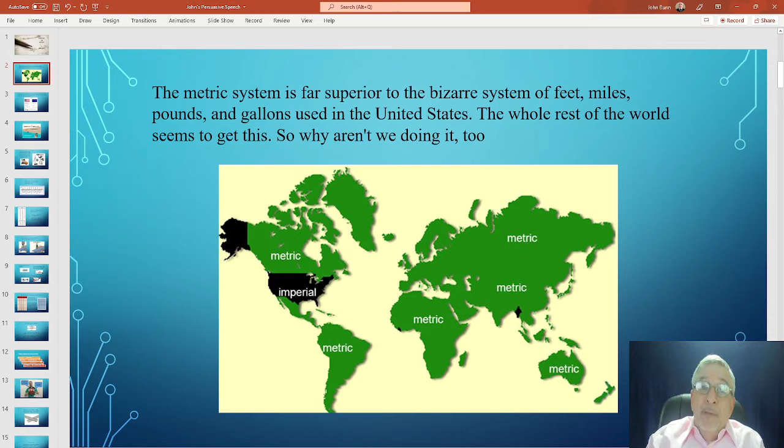Good afternoon. I'm John Bunn, and I'm speaking to you today to convince you why the United States should adopt the metric system. The metric system is far superior to the bizarre system of feet, miles, pounds, and gallons used in the United States. The whole rest of the world seems to get this, so why aren't we doing it too? There are many reasons why I feel we should change to the metric system, but for my speech, I'm just going to discuss the technical side of linear measurements and weights.

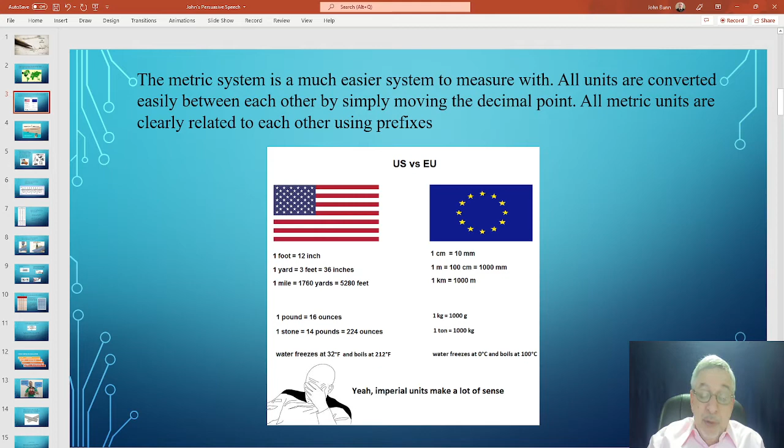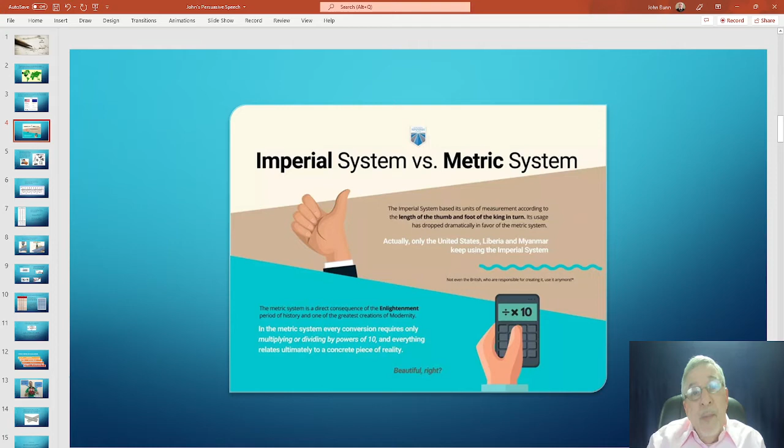The metric system is a much easier system to measure with. All units are converted easily between each other by simply moving the decimal point. All metric units are related to each other using prefixes. Kilo means 1,000, so we instantly know that 1 km means 1,000 meters. I was a machinist for nearly 20 years. Everything had to be made to precise measurements. I've been doing construction work for over 10 years. Everything must be cut to a precise size.

I think it was best summed up on the website acreofpints.com, the pros and cons of the metric system, when it says the metric system is simply based on 10. Metric units can be as precise as you need them simply by moving down to the next prefix unit. If 1 gram is not precise enough, you can use milligrams.

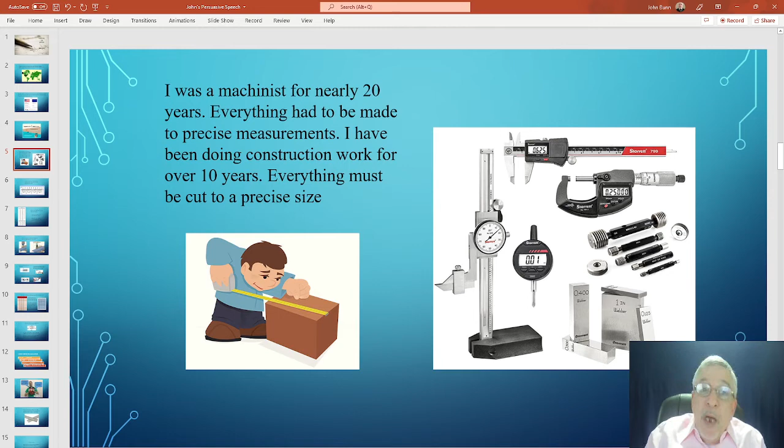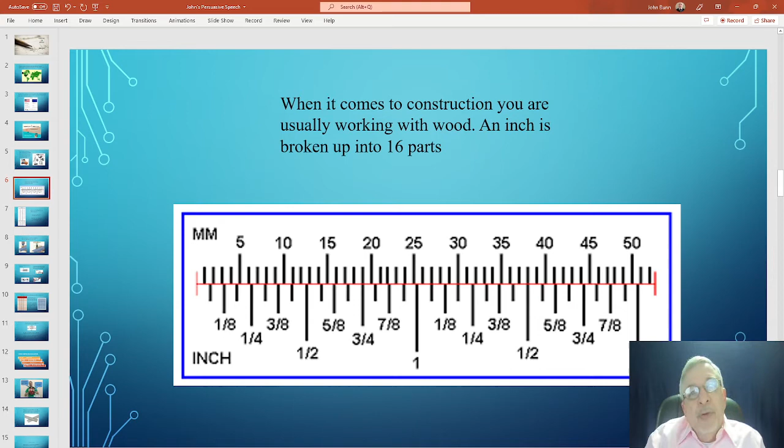When it comes to construction, you are usually working with wood. An inch is broken up into 16 parts, 32 parts if you need to be more precise. A 3/4 inch sheet of plywood is listed as 23/32 thick. Wouldn't it be easier to just ask for an 18 millimeter sheet of plywood?

Now, let us look at working with metal. Suppose you need to drill a hole at a very close tolerance. There are 115 different drill sizes under a ½ inch. Metric drills run in tenths, 5.1 millimeters, 5.2 millimeters, or even hundredths if you need to be very precise, like 5.25 millimeters.

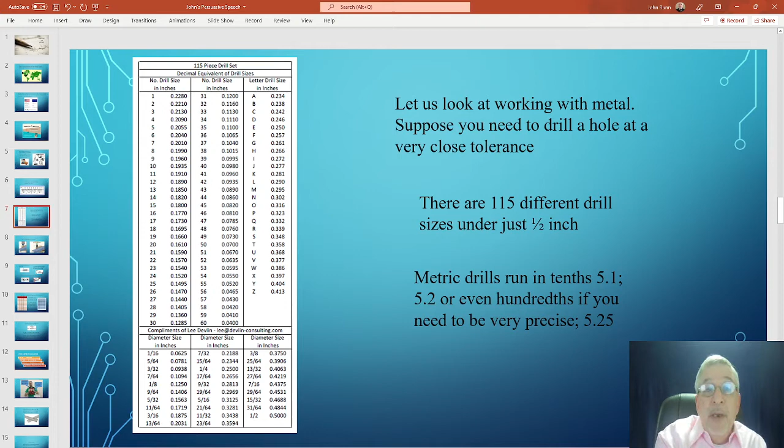Now, the standard drills come in 3 different classifications. Fractions are measured in 64ths. There are 64 sizes in an inch. Then there's the wire sizes. There's 80 different wire sizes. And then you have the letter sizes running A to Z. There's 26 different sizes of them.

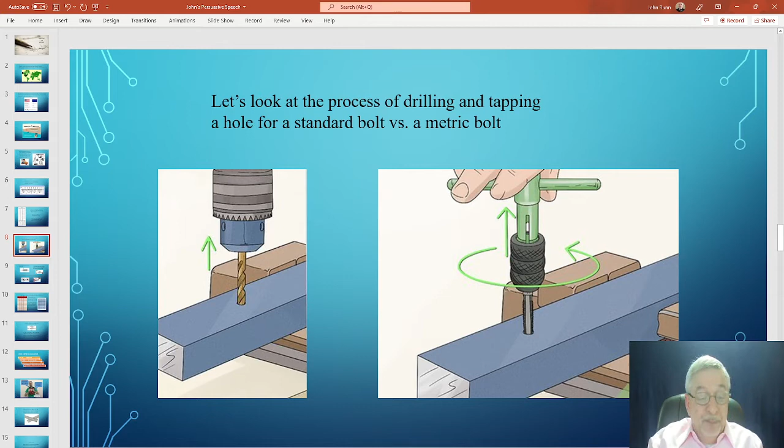In conclusion, I will explain the process of drilling and tapping a hole for a standard bolt versus a metric bolt. First, a bolt is sized by its diameter and thread pitch. For a standard bolt, the threads, called the pitch, are measured by how many threads are in an inch. Let's take a common 1/4-20 bolt. That means it's a 1/4 inch diameter, 20 threads per inch.

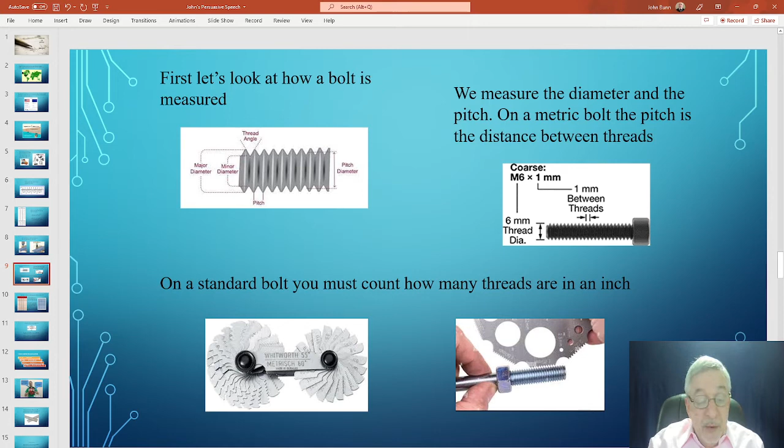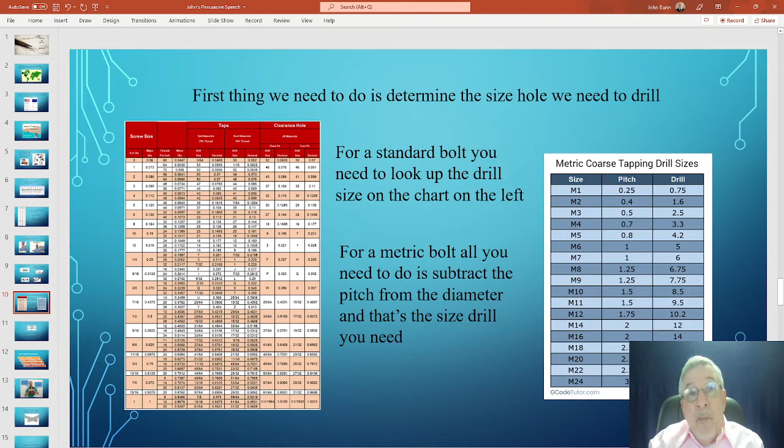To drill a hole before I tap it, I have to look it up on the chart to find out what size drill bit I need. In this case, it would be an F drill, 0.201 inches. Now, I realize you can't read the chart on the left. I just wanted to give you an idea of what the chart looks like, and that's only up to 1 inch. Now, for the metric bolts, it's very simple.

I will use a common 6x1 metric bolt. It is measured the same way with one exception. The threads are measured by how far apart they are. The 6x1 metric bolt is 6 millimeters in diameter, and the threads are 1 millimeter apart. For the 6x1 millimeter bolt, I just need to subtract the pitch from the diameter, and I know what size drill to use. 6 minus 1 equals 5. I need a 5 millimeter drill.

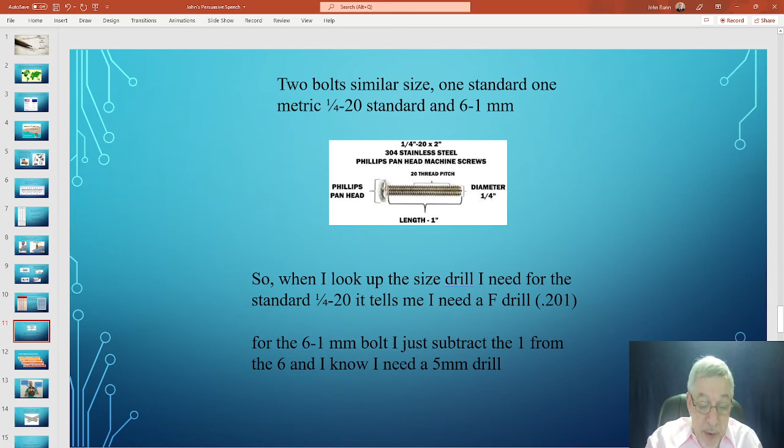Now let's play around with just some simple calculations. Say I want to convert 2.5 kilometers to meters versus 2.5 miles to yards. Okay, 2.5 kilometers is 2,500 meters. To go miles to yards, I go 2.5 miles times 1760 yards per mile equals 4,400 yards.

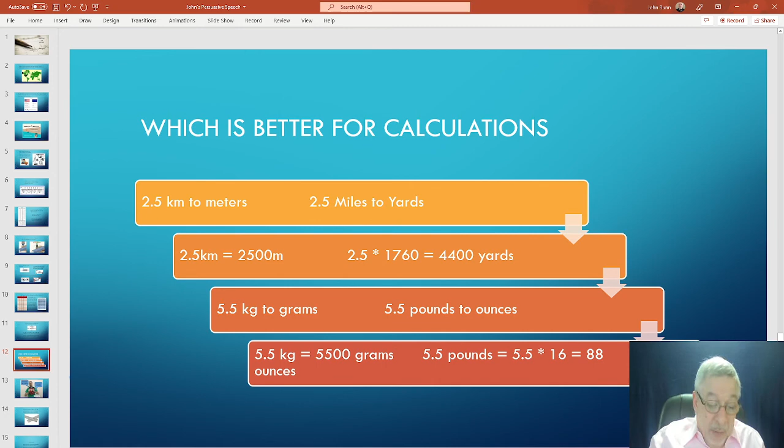Now, if I want to convert 5.5 kilograms to grams, 5.5 kilograms equals 5,500 grams. If I want to convert 5.5 pounds to ounces, I've got to go 5.5 pounds times 16 ounces per pound equals 88 ounces.

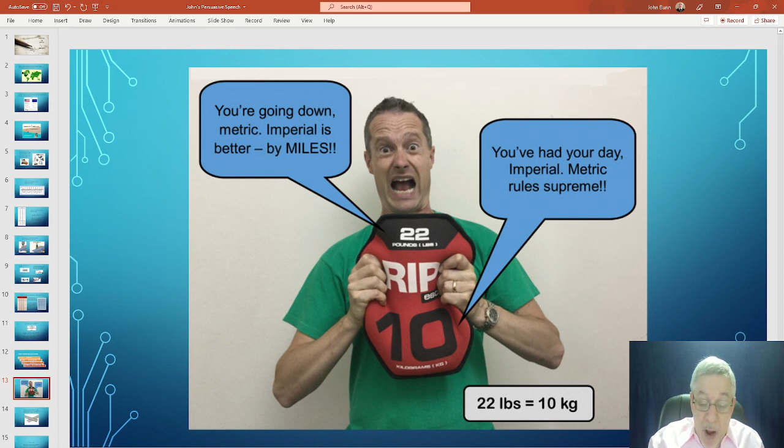If after this you still prefer the imperial system, it may be because it's what you were brought up with and it's what you're used to. But the average Frenchman or Chinese woman wouldn't understand what a mile, a gallon, or a foot is. The huge advantage to the metric system is that it's standardized. It's the same all over the world. Having spent most of my life using both systems of measurement, I can honestly say that the metric system is far superior in every way.

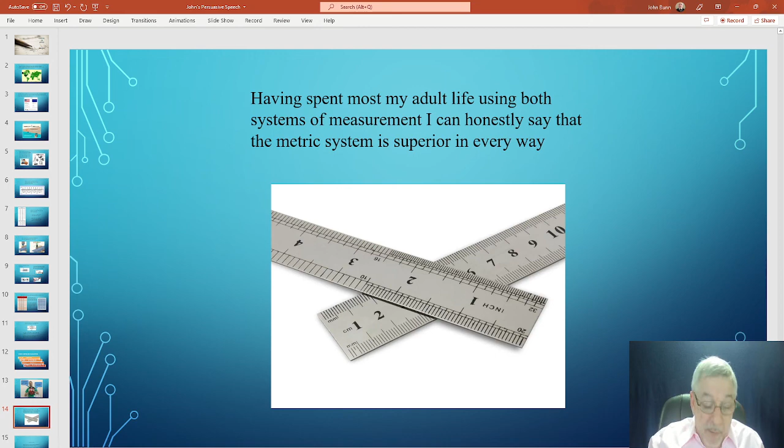Thank you for your time, and I hope I was able to convince you of the advantage of changing to the metric system over the imperial system.